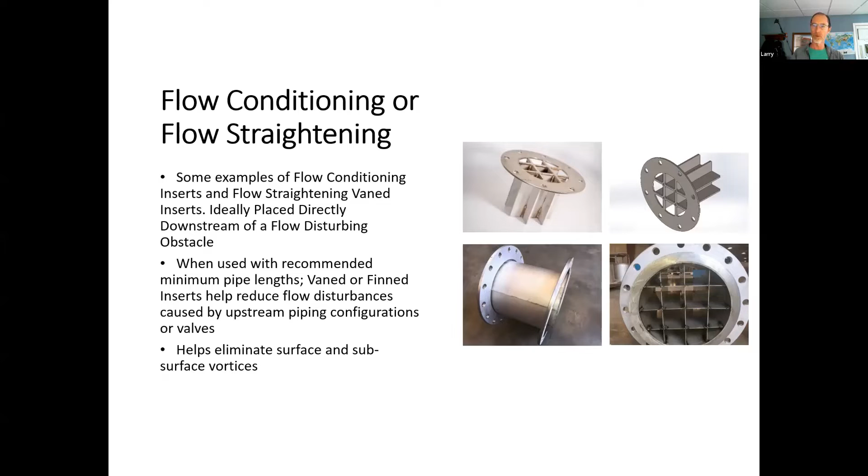Without having to move the meter. And sometimes you can utilize a flow conditioner, a flow straightener, within the existing piping alignment that helps to, yeah, great. These are some examples of what those would look like. Flanged fittings, within a foot or two, or even less than that sometimes, being able to help channelize the flow and getting it back to where there are no vortices or swirl going on within the flow stream, which is what really tends to mess up the flow measurement.

Yeah. Good deal. I know we had some content. We're keeping it fairly high level, Larry, and didn't get into some of this, but since it had come up, I wanted to throw that up on the screen. Yeah. Great.

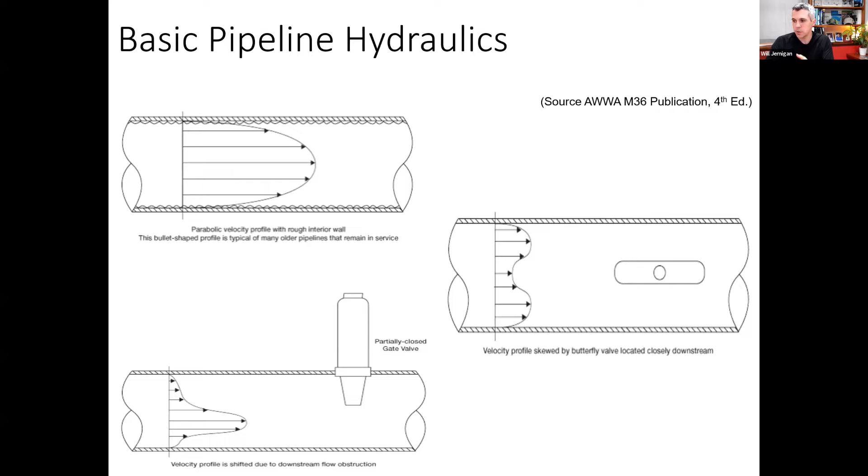It sounds like my group has done some clamp-on testing, and so for others, that's definitely going to be a topic of conversation working with your coach, because this is a common next step, and so it's likely that each coach will be working with their utilities to really talk about what that would look like and helping to plan out next steps about supply meter testing in your system.

Just a quick comment. I know some folks have mag meters and also ultrasonics. Just maybe a reflection on that: hey, those are highly accurate. Do you need to test them, and why? Sure. So it is a question we do get. I was going to show a couple good example pictures, Steve. You do need to; there is no meter that is immune. Some meters handle it better than others, but there's no meter type that is immune from disturbed hydraulic conditions.

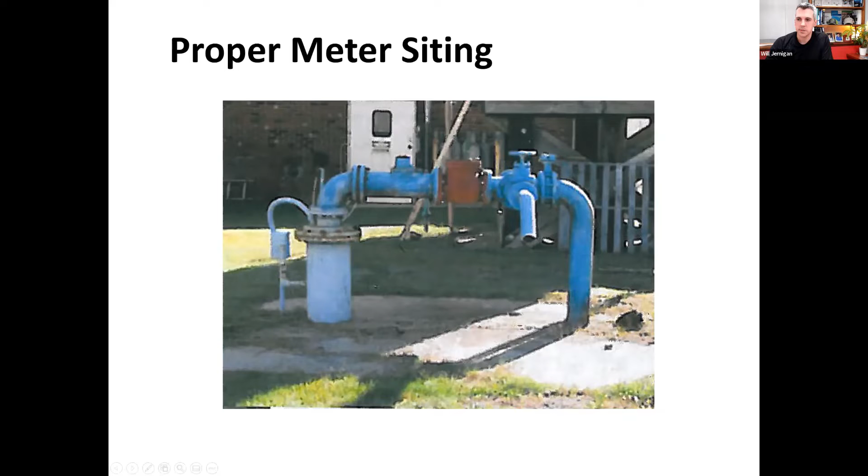All right, I want to touch on another common next step that we typically encounter. It deals with customer meters, and we want to acknowledge up front that not every tribal utility participating in this program has customer meters. So if you don't have customer meters, this part you don't need to worry too much about right now. But there are some tribal utilities in this program that do have customer meters that are generating revenue. And if you're in that scenario, this is an important part of your overall water loss strategy.

The reason is that how well you understand your apparent losses can really impact how well you understand your leakage, because those two numbers work together in the water balance. It's a water balance process of elimination. So you're estimating the apparent losses, and your real losses become what's left over. So if you don't have a great idea of what's going on with your meters, that can have a big impact on how effective you can be on your leakage management program.

So I'm going to give the 30,000 foot flyover of customer meter testing activities as a next step. It's really meant to get better insight into how the meters are performing, first and foremost. That also might inform how you replace the meters. In our breakout group, we had a discussion about manufacturers' recommended guidelines, which is maybe every 8 to 12 years to replace the meters on our metered customer connections.

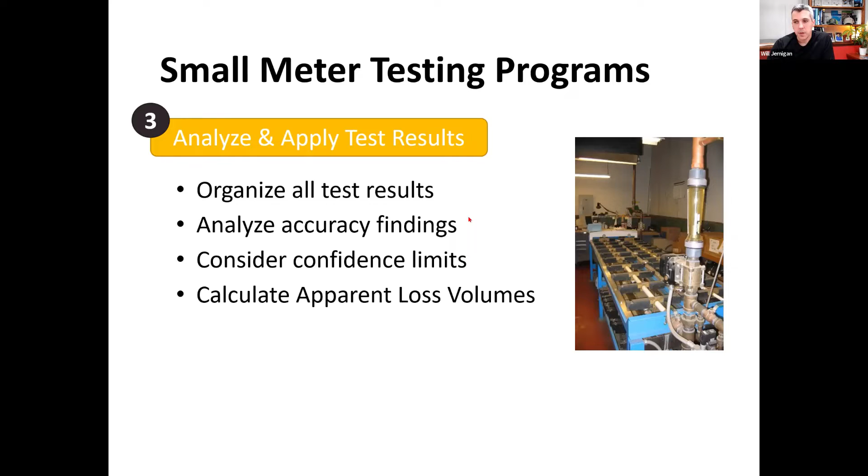So in the end, a small meter testing program can get you a good understanding of how your whole small meter stock is performing by doing random sampling, doing weighted averages across the different flow rate test results, and using that to then translate into your water audit. Remember, in the water audit, there is one box for customer meter inaccuracy. And so all of this activity can help you move from, well, we think the meters are doing okay, so we're just going to guess 1% or 3%, some sort of number you're pulling out of the air, to having something that's a bit more scientifically based. You've got data to really dig in.

So those are on residential meters. I'm going to just quickly touch on bigger meters. Let's say it's the casino or a larger customer account, an industrial account. Typically, these are a lot fewer, maybe just a handful in your system. And usually you can take them on a case-by-case basis. Sometimes people just say, hey, if this is one of our highest revenue generating meters, then we're just going to test it every year and keep a close eye on how that one's doing. These actually end up being sometimes a bit easier to deal with because you don't have quite as many. The trick is the size.

So it depends if you're into maybe a 3-inch meter, 4-inch meter. If you get much past 2-inch, it's not quite as much a bench test anymore as it is a field test. And there are apparatuses that mount to the back of a truck that you can utilize to perform these types of tests. So that's the high level of the difference between small meters and large meters. Small meters, you tend to have more of them. Large meters, you have fewer of them, but sometimes they are actually generating more revenue. So you approach them as two different animals and design your program accordingly.

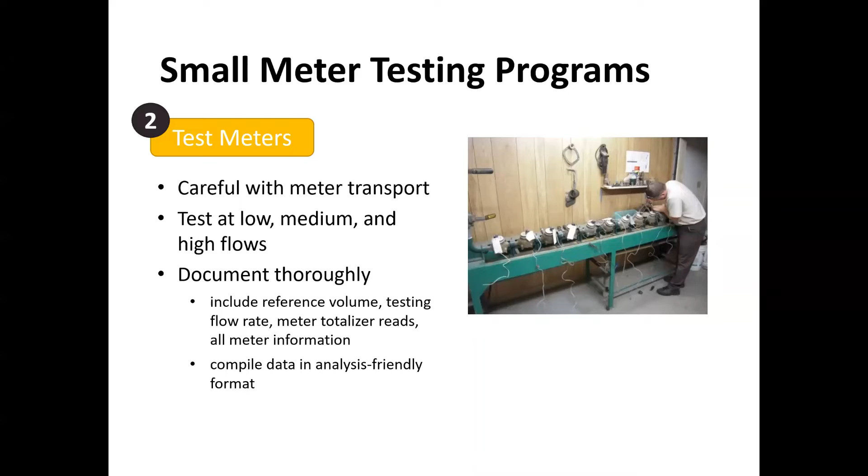You can imagine though, if this is the supply line to a community, you're going to need to shut it off for an hour to perform this test. So that is operationally a consideration, but as long as you can find an hour where that's not a problem, fill the tanks up and let it float off the tanks for an hour. But this is typically how that's accomplished. Yeah, that would work because you have your storage tank on the system, so having a well down for an hour wouldn't be a problem.

Great questions. Maybe just a quick reflection point: do others have that where your supply meters are kind of small, really not much bigger than your customer meters? Similar scenario? Giving folks a moment to get off mute if you wanted to chime in. And no sweat if you're not ready now. That's something your coach is going to be working with you one-on-one on, talking through your scenario.

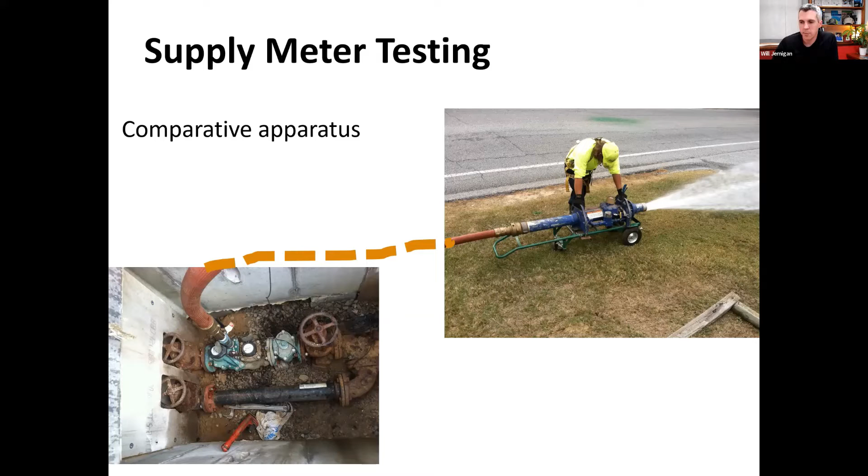To answer your question, it helps if you have data on the meter inventory when you're doing that. Certainly the size of the meter is important. The manufacturer of the meter, if you have that, that's helpful. The install date, if that's available, sometimes that can be helpful in creating bins, especially if you've got a whole bunch that were installed 20 years ago and the rest were installed in the last year. You've kind of got two different buckets you want to think about pulling from there. So bottom line, as much data as you can put your hands on will probably make your sampling as effective as it can be, and truly random.

Okay, great feedback. Let me round us out thinking about this topic, which is our unmetered but authorized consumption. What I'm going to do is really just set the stage here for some important things to think about. We'll handle the nuts and bolts of doing these estimations together in your coaching sessions, or a little later in the breakout today we'll talk a bit more about it. But after this week, when we're working together to help build your level 1 audit, that's where we're going to get into it. But let's start with a common ground that we all are going to be working from.

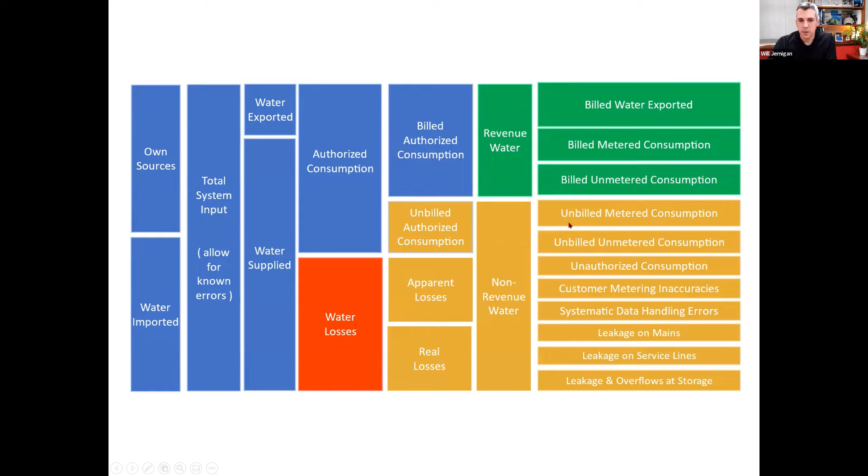We all have a water balance, and so we all need to examine which of these potential unmetered categories we are dealing with. All the way to the right of our water balance, let's zoom in on these two categories of unmetered but authorized consumption. You can see that one of them is in our green section that generates revenue, and the other is in our non-revenue section. It's not generating income for the utility. Typically this is going to be your unmetered but billed customer connections, and you're billing them based on something. It's going to be a flat rate by nature. The question is, what is the basis upon which the bill is generated? That's a core question.

Second category is those customer connections where there's a tap off the main and it goes to their facility, a house or a commercial facility, whatever it may be, but there's no meter, there's no bill, but they do have permission to use water. So it is an authorized use. I do think we have some of that in my breakout group. So again, we need to think about the same question: okay, we're not billing it, but what is the basis for making some type of rational estimate, and have that baseline when we're developing the audit.

Of course, utility usage and fire usage are examples that we've touched on a little bit, and we'll tee that up in a second. But all three of these potential examples of unmetered use need a unique approach to how you're developing these estimates. So I wanted to start by asking: if you're billing customers but there's no meter on the connection, I'd love to hear how you are determining the bill amount, and what is your current approach to establishing how much to charge them for water consumption? It could be on a monthly or an annual basis. Do I have any volunteers in the class to speak up and share how you're handling that?

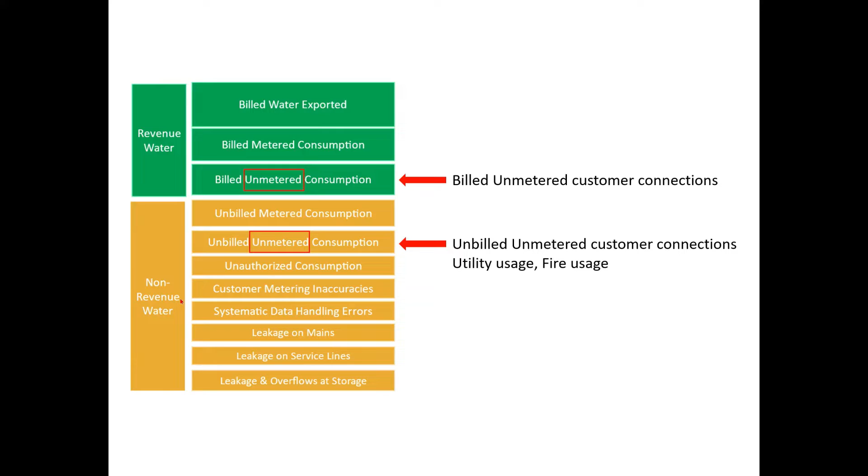Yeah, that's correct. We're a subsidized department through the tribal government, and even the revenue that we do generate goes back to the tribal government, and we don't have any control of that revenue. Okay, I see.

All right. Well, thanks. Just one other... I'm sorry, go ahead. We're all talking over each other. Rolanda, you go ahead.

Yeah, I was going to ask, based off of what I said before, what would be the recommendations? I think the facilities that I'm looking at do have supply meters. And I'm thinking just the estimated number of homes that we assume are connected to the system, because some tribes do their own connections, right? They may not have proper as-built drawings or provide that information to IHS. So in my mind, it would just be the estimated supply connections per home. But are there any recommendations from Cavanaugh on how we would estimate the proposed water usage?

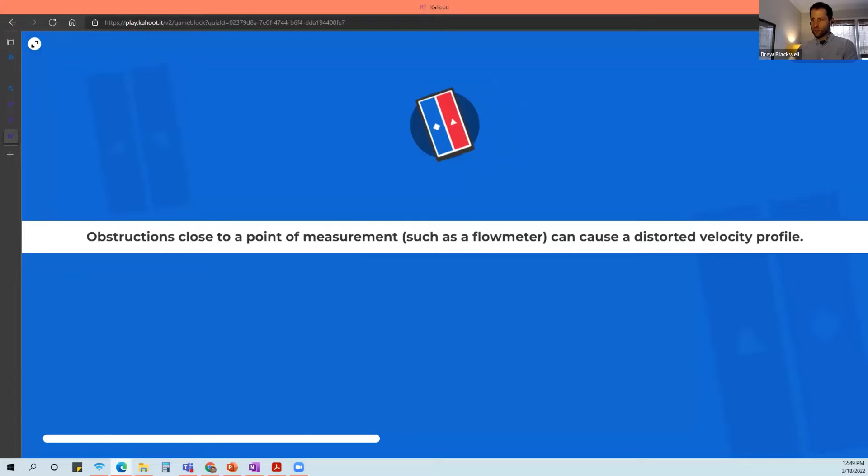Hey, at least we're getting some testing our knowledge on these terms that we've been talking about, right? Unbilled, metered, test port, BMAC. All right. I think we're ready to go here. So let's launch the supply meter testing. All right, true or false? Obstructions close to a point of measurement, such as a flow meter, can cause a distorted velocity profile.

Okay, you guys were on top of that one. Yes, true. So the different velocity profiles that Will and Larry walked us through, and you saw the image there of a partially closed valve that was certainly distorting that flow profile there. All right, let's go to the next one.

Oh yeah, gotta make sure we check out our leaderboard. All right, Nicole is in the lead here.

All right, choose a consideration when thinking about supply meter testing. What do we need to think about there? All right. We are not fooling anybody today. Yep, definitely. All of these are considerations: flow rates, test location. Think about that image that Will pulled up, where it was really impossible to get a good test there with that meter location. And then that test duration.

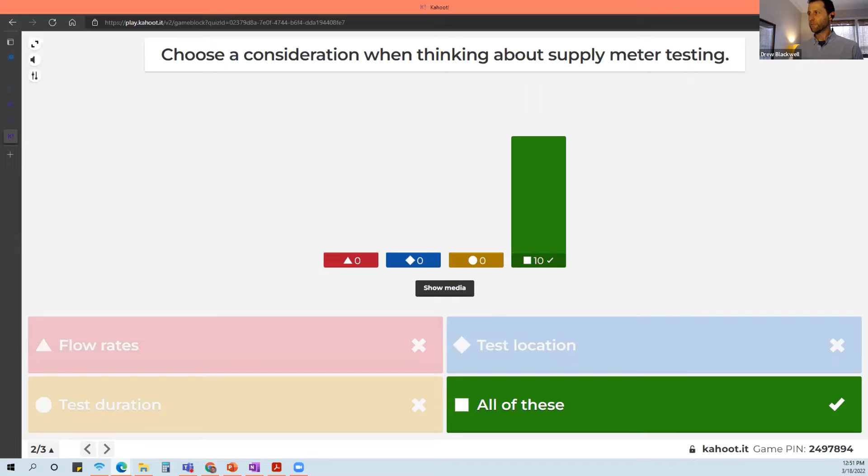We were looking at that example, Ross, that you brought up, with the comparative analysis. And if we are using that on a smaller meter that's providing the supply, if we need to shut off service there, we want to take that under consideration, not just operationally, but based on the test method, if it really requires a certain duration. All right.

Okay. Trish has just squeaked into the lead there. All right, so this will be the last question for our supply meter testing to see who the supply meter testing expert is here. All right, which is not a supply meter test method? All right, man, you guys are on fire today. All right. Unbilled, unmetered.

I had to turn on some sound. I'm actually not sure if you guys can hear that sound or not, but if you can, I thought it was a good ad for those on the podium. Okay,

so that was the supply meter test. Now we're going to move to testing our knowledge on the customer meter testing as well. All right, so unfortunately this one does have a new pin here, guys, so you'll have to enter one more pin. And again, for those that would like a verbal cue, the pin number is 688-6562. 688-6562.

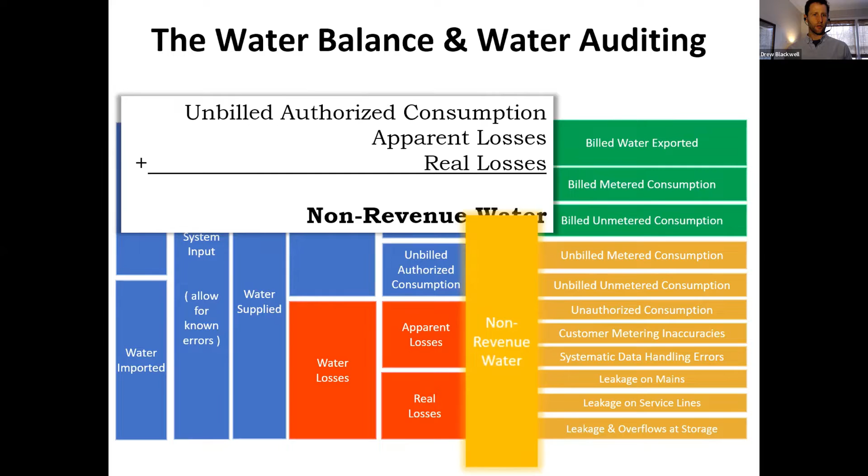All right. So again, we went through that common exercise where we were working through our water audit boundary, whether we had water exported or water imported or volume from own sources. It's important to understand what are those meters that we are concerned with, that closest point of entry of treated sources into our distribution system.

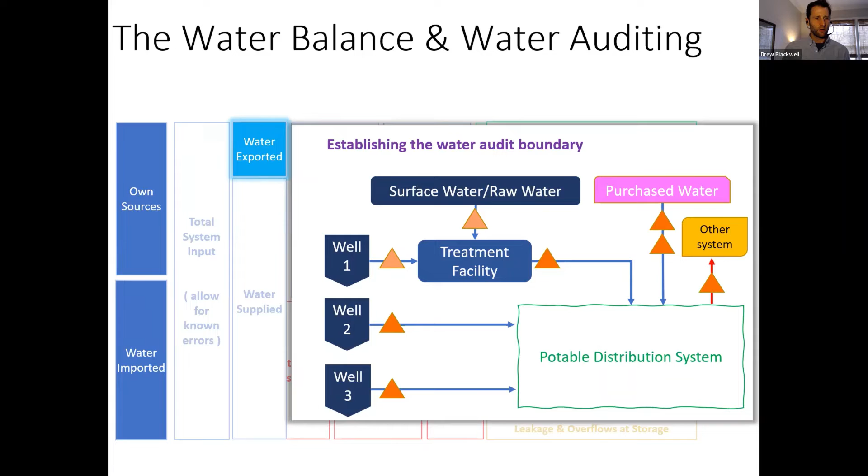All right, once we understand that, we started talking about introducing you guys to the free water audit software, and started out with, again, asking that question of why have a water audit. And it's really that first step that utilities are taking towards measuring their water losses, quantifying their water losses. Without that, we just don't know what water we're losing. Regardless of our incentive, whether our incentive is revenue driven, or as Will suggested with our unmetered authorized consumption, it could be more driven through accountability and just operational efficiency, and reducing some of those costs. So it's that first step that we're taking to quantify our water losses, and I guess knowing a little bit more of what we don't know.

So we gauged folks at the beginning of this program to see where you were in the process of understanding the water audit, what your background was, and through the course of this week, we definitely picked up on the sense of excitement to get hands-on in the software. There's a little bit of a teaser on day one with sharing the still images, and once folks got to click around and start entering inputs into the water audit software, that's where the thinking of how this might work for your utility begins.

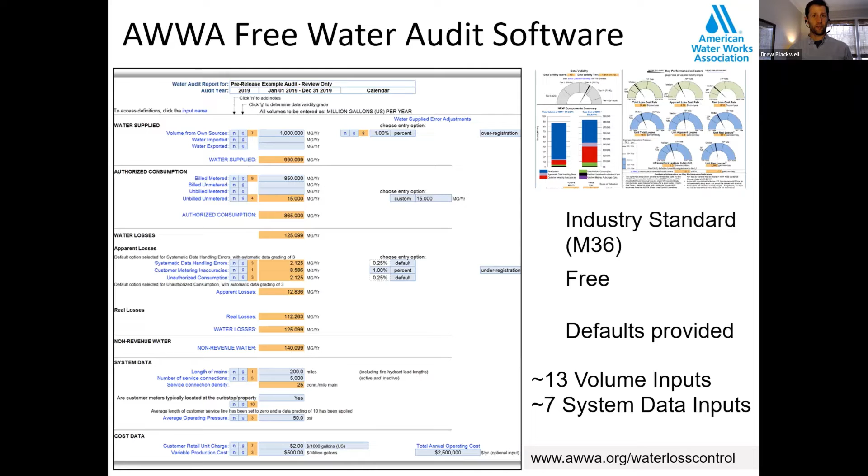Not a ton, there's approximately 13 inputs for most systems that will be applicable to them. Some will be applicable, some won't, but it's not a lot of information to key in. And as you guys picked up, and we'll continue to see, probably the greater effort there is making sure that we're gathering the information and understanding if it makes sense and if it's correct before keying it into the water audit software.

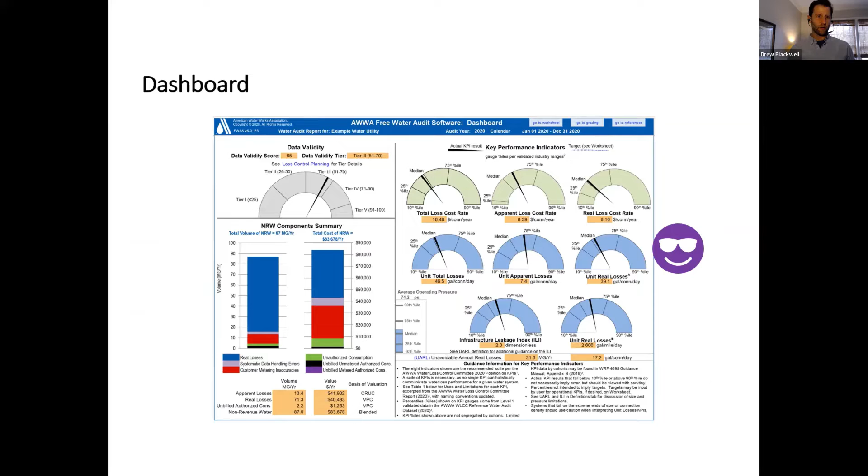We spent some time on the results, on the dashboard setting. So one thing that we are interested in learning about, of course, is how to interpret these results, starting from what does our data validity mean, that score out of 100, that fighter jet dashboard that Will introduced, and what are these percentiles based off of?

And now we understand that these needles on our dashboard are not necessarily how we're stacking up against other tribal utilities, but where we fall with respect to other validated water audits in North America. We can see that from a volumetric standpoint, our losses in gallons per connection per day, as well as from a cost standpoint in dollars per connection per year. And over in the left-hand corner, we see a non-revenue water profile in terms of volume and value.

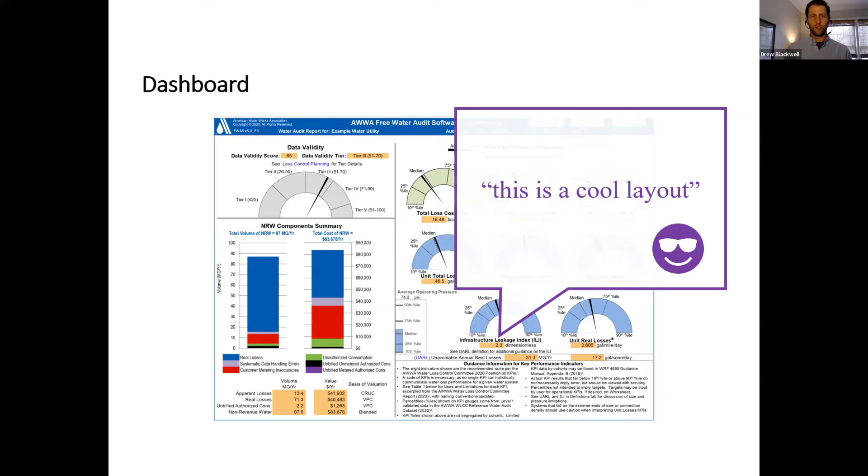And remember, your largest component volumetrically is not necessarily going to be your largest component from a cost perspective. It could be your largest component volumetrically is leakage, but your largest component from a cost standpoint could be your metering inaccuracies or something else. So something to keep in mind when we populate our water audit and are looking at our non-revenue water profile.

All right, but before we even get to that, Will walked us through some steps on how to develop those inputs. There was a 3-step process that we went through: assemble the supporting documents. So we looked at some that we really need to have to conduct the water balance, right? Our supply data and consumption data.

So we have some information that we need to have to run the water audit, but there's also some information that is not required, but it's good to have if it's available to us and applicable to our system. So if we have metered customers and we have some test results, that might be good to have, but not necessarily required. But to calculate our water losses, we do need supply data and consumption data. And I'll show to what extent we need that in just a second.

But once we assemble those documents, we always have to make sure: does the data make sense? Are there any errors or any gremlins, as room 3 so aptly coined it, embedded in the data? They can pop up in any place, and as part of this validation process, your validator, your coach, is going to be looking into that to make sure that all the data has been brought into the water audit correctly.

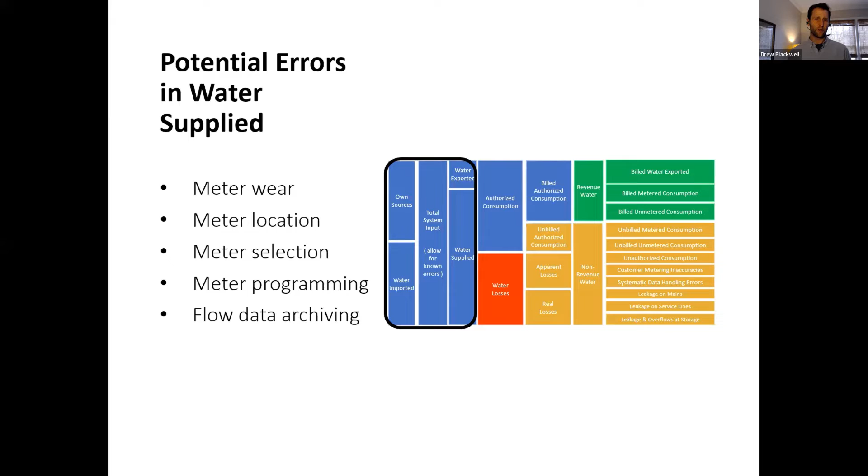Just as there is in the authorized consumption as well. It could be in the form of duplicated volumes. Maybe we have some non-potable volumes that are inadvertently included in our consumption data, or maybe we're lacking some information there. But these are all known places for error, places to look, and continuing to ask ourselves as we're pulling together the information, does this make sense?

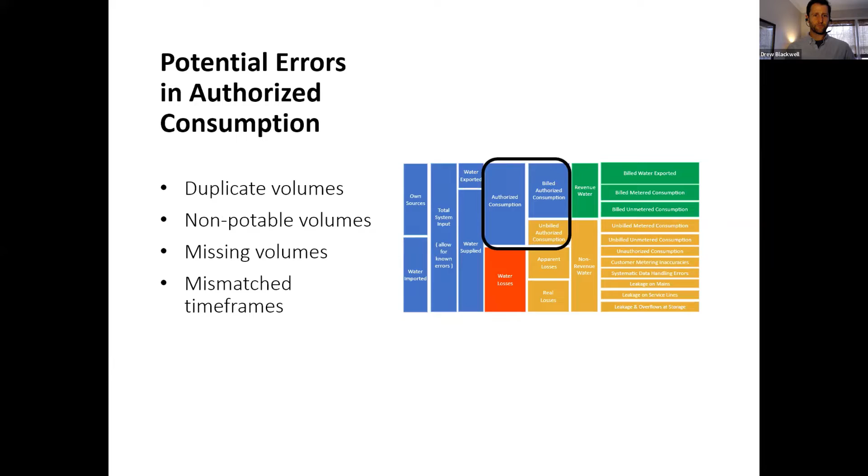All right. So yesterday we started talking about the concept of data validity, the data validity grades, and that level 1 validation. We always look at our water audit results in terms of these 3 V's: the volume, the value, and the validity. We see here again validity as the biggest cog in the wheel. It's an important part of your water audit. Understanding how reliable is the data that's going into our water audit.

So we know if we have a low certainty of data going into our audit, we're going to have a low certainty in the results that it's producing. But through this new interactive data grading process, the software tool is extremely helpful in helping us understand what our next steps are going to be, as far as identifying that there's limiting criteria there.

So you saw as we made our selections in those drop-down menus, that limiting criteria started to move around until we finally got to our data validity grade, and it landed on what the 1 or 2 limiting criteria might be for that particular system, and that gives us a roadmap of sorts to understand what practices we might consider implementing into our system.

And even if it's not a utility perspective, even if it's from a local IHS staff, this helps us understand, again, some of that operational efficiency, some best practice management that we might consider inserting into our system.

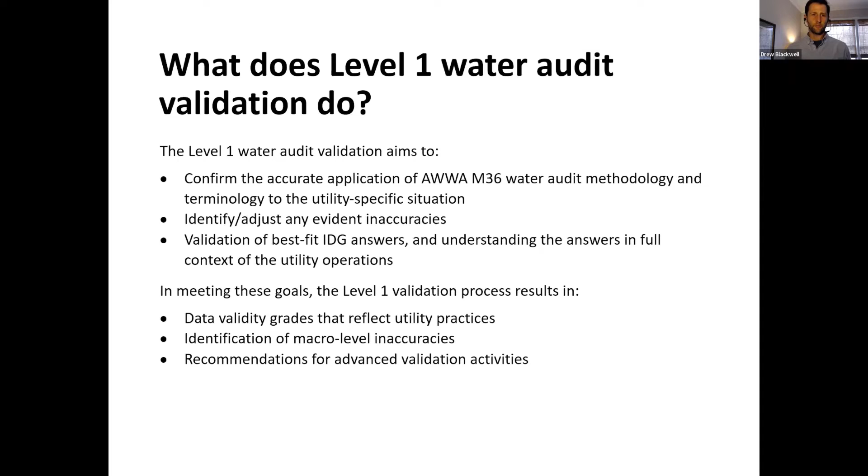A couple things that it doesn't do: it doesn't go out and test your meter, your supply meter. It doesn't correct any of those inaccuracies in the raw data, and doesn't corroborate any of the leakage that is quantified in the water audit based on any more detailed analysis, more bottom-up approach. Those are certainly available beyond the audit, but that is not part of the scope of a level 1 validation. That is really keyed into making sure the data is brought into the audit correctly and assessing those data validity grades correctly.

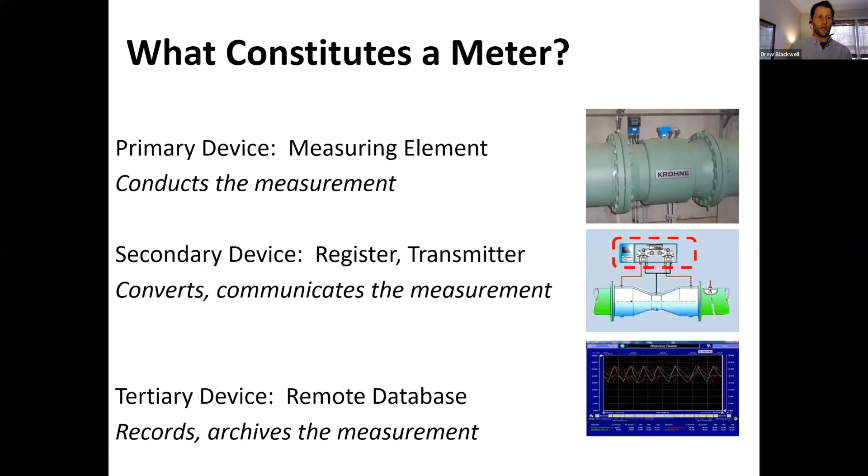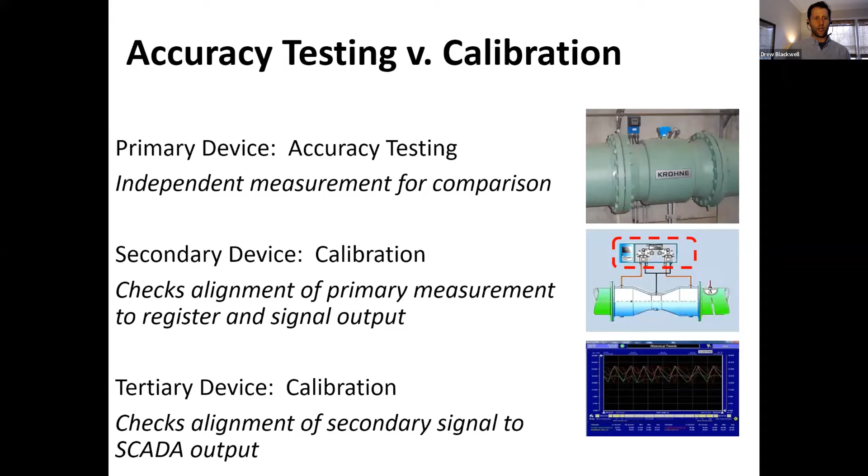I'll move through these pretty quickly because we just talked about these, but the supply meter testing, really just introducing the considerations that we need to think about before we jump into it. Understanding the different components of the meter, and what type of testing, whether it be flow accuracy testing or electronic calibration. We need to understand the anatomy of a meter and what type of test it is we want to perform. Will and Larry walked us through these different test methods.

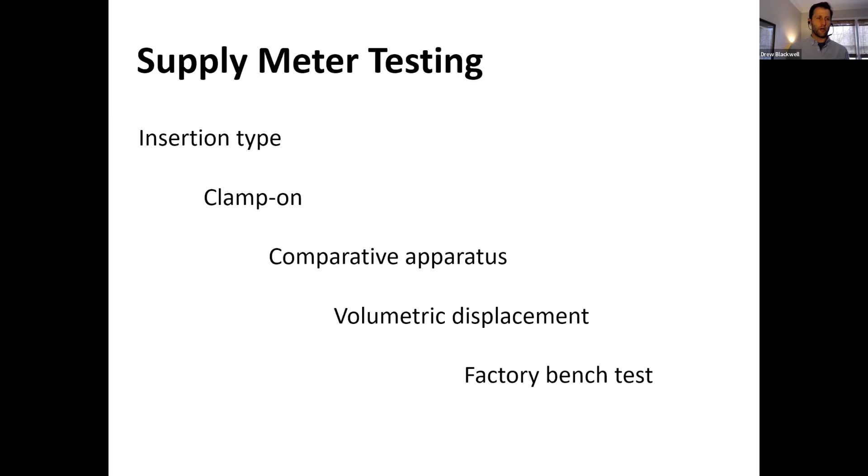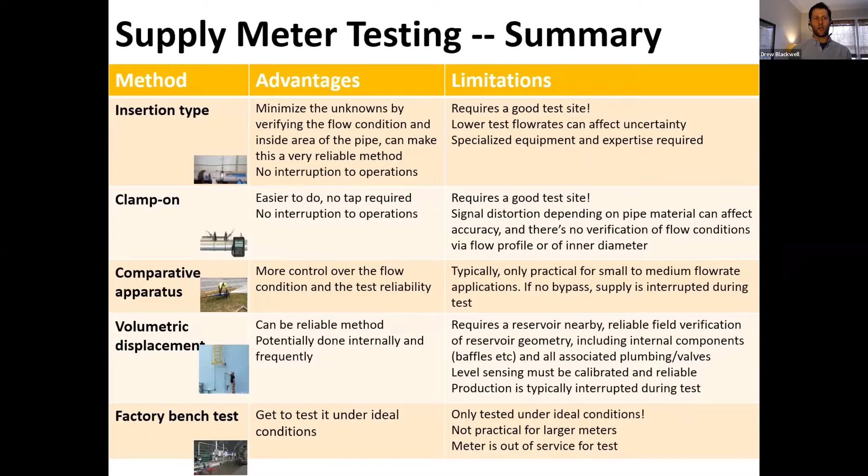There's a variety of test methods out there because depending on your meter setup, some of these test methods might not be available for you, or one of these might be the best available method that you have to choose with. So this is a great takeaway slide here that we'll share on the resources page on the website. But this is just a good summary slide to help you understand what type of supply meter test might be most beneficial for your setup.

Will walked us through the customer meter testing, and at a high level, this is going to help us calculate our apparent losses. If you recall, in the water balance, our apparent losses are made up of the systematic data handling errors, customer metering inaccuracies, and unauthorized consumption. Typically, in a setup where the customers are metered, customer metering inaccuracies is typically the largest volume of our apparent losses.

So if we can, we want to make sure we get the best handle on that number as possible. The other two components there have a default option, and without further analysis, those are also difficult to quantify. So if we have some information on how our customer meter population is performing, we want to use that information to build it into the audit.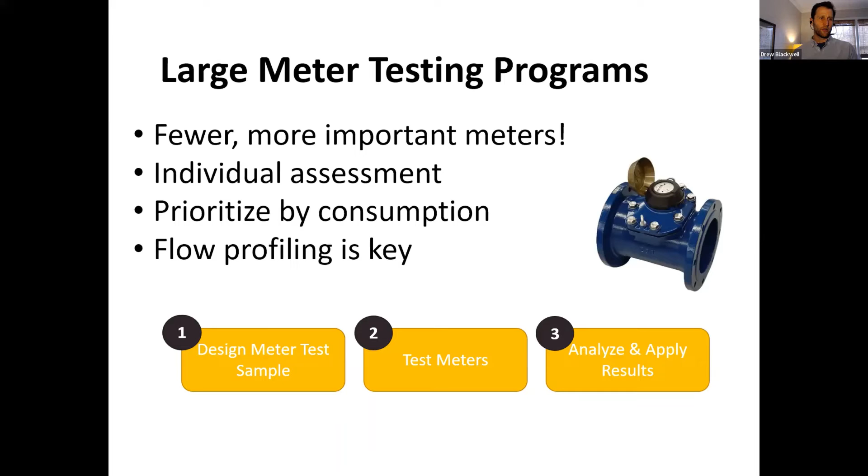The unmetered authorized consumption here is one thing that we know is going to be very relevant to many of the tribal utilities in this program. This is whether it's billed and unmetered. There's some ways that we can estimate that typical household usage or understanding the number of connections. If we have some billed metered customers, perhaps we can infer some of the consumption behavior to estimate what some of the billed unmetered consumption is. But if we're unbilled and unmetered, and we don't have any of that billed meter data to go off of, then we need to find another way to estimate that.

We know that some unbilled unmetered usage can be uses at your own facilities in your own system. Some of it can be attributed to fire suppression or any other usage where your policy dictates that usage is exempt from billing or from metering. But if your end users, your customers in your community, are also unbilled, unmetered, we need to look for ways to estimate that. So that's one thing that we're going to be looking at. You're going to be working with your coaches to pull those estimations together.

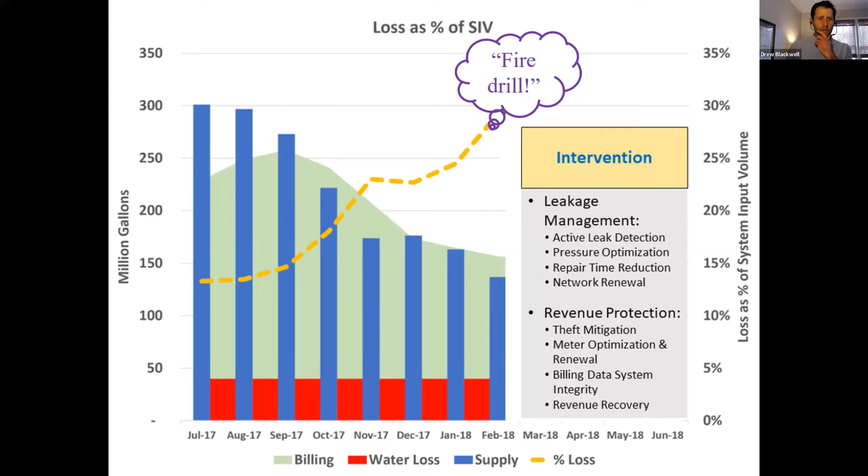So that first step was a more technical analysis. This could include a detailed data analysis into your billing information, down to the raw billing data at the account level, or it could be performing a real loss profile, a leakage profile there. So what that leakage profile might look like, just as an example, is to separate out your different types of leaks.

When we think about leaks, we commonly think about the leaks that are coming to the surface, and a member of your community or your staff are alerting you to these leaks. But usually those are just the tip of the iceberg, the smallest part of your total leakage profile. Unreported leakage are leaks that are not coming to the surface, but they're typically detectable through acoustic leak detection. There's also background leakage, those weeps and seeps in your pipes. Those are not always going to be detected through traditional leak detection.

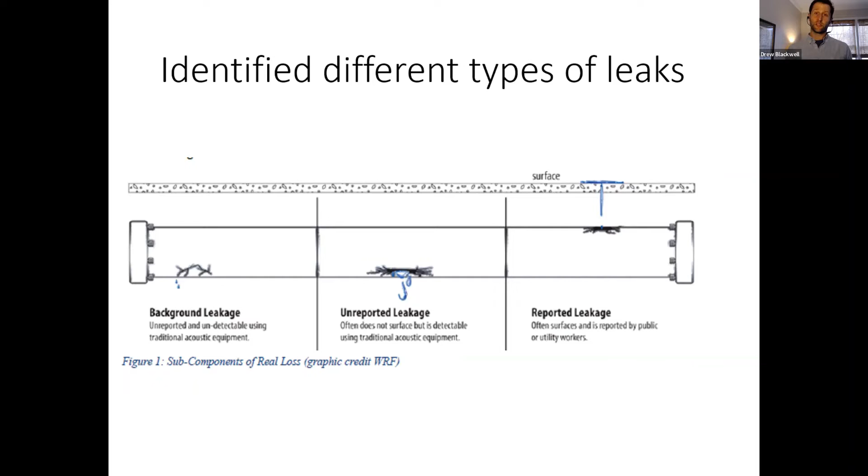So the takeaway there is that each of these different types of leakage has a different intervention strategy that's appropriate for it. So this real loss component analysis, as it's termed, is one step in that technical analysis that you can do beyond the water audit when we're ready to make that step. And you can see again, different types of leakage have different tools associated with them, from reported leakage to main and service replacement, to unreported leakage, where maybe we're doing leak detection, and then background leakage, where maybe pressure management is the right tool for the job.

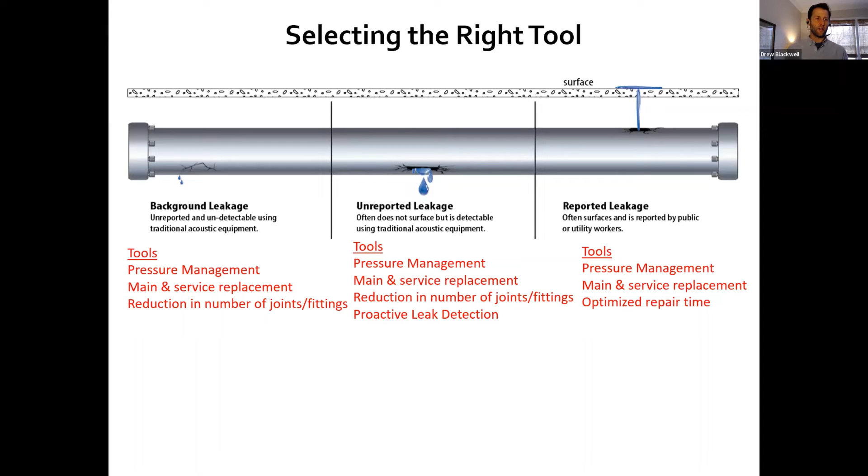In economic analysis, we've said several times throughout each day of the workshop that our goal is not to get to zero leakage. In fact, we would most likely be overspending more than the water is worth, either through aggressive overspending or reactive overspending. So our goal in our water loss program is to find that economic optimum level of intervention. And we can do that through an economic analysis by understanding what is economically recoverable.

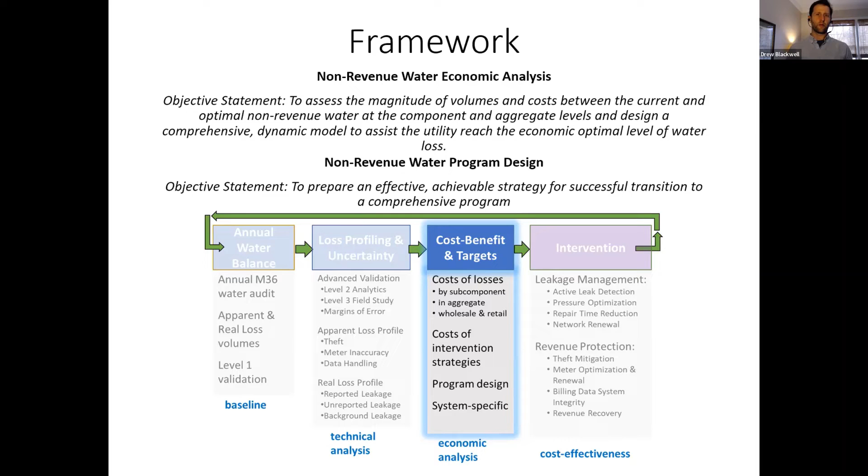Again, these are all steps that we would consider beyond the audit, but it's good to start thinking about what steps you might take further on down the road, whether that's a year or two years down the road, understanding that as we progress through our water loss program, these are next steps available to us.

So in economic analysis, at a high level, we'll take what our current annual real losses are, determined through the water audit, and then what is economically recoverable. And so we have that gap in between where we have room for recovering that revenue in our system there.

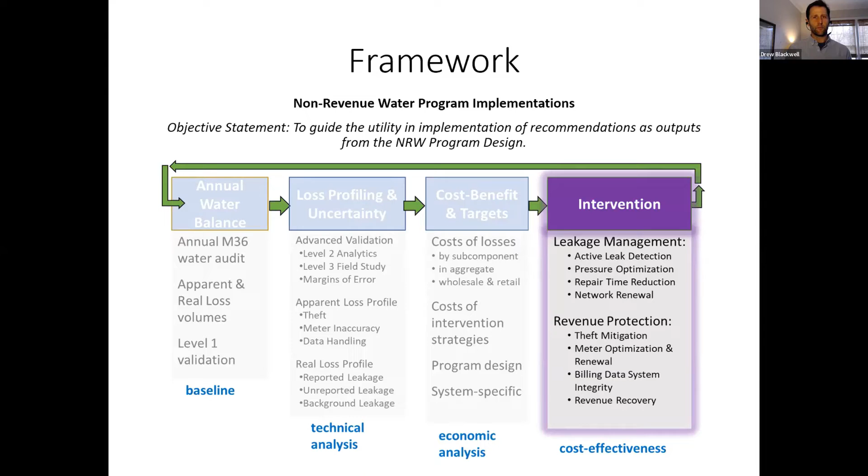And then the intervention strategies: each of these steps along the way will help define what is going to be the appropriate intervention strategy for our specific loss profile. And it's important to see that reducing our water loss can be beneficial in so many different ways. We often say that the closest and most obtainable source of additional supply is that water that you're losing in your distribution network each year.

So we know that these water loss control and management activities can have real significant cost savings here, and a lot of you are starting to pick that up as we've moved through the workshop this week.

Hey, Drew. Yes. Drew, just if I can add one quick comment there.

I think about just the tribal systems themselves, and looking at putting forth programs for infrastructure improvements. Maybe it's funding packages supporting the need. It's programs like what we're talking about here that carry it through to be able to say, instead of we've got this need and it may not be as well documented.

What this process does for each tribal utility is to establish that baseline, as you've been sharing, but also to be able to show, hey, now we can start taking some looks at the economics and then the implementation strategies. So I think about it in terms of documentation of need, and in many cases, not just in tribal nations, but in state systems and other utilities, there's an intended use plan, or there's some justification for funding. And this plays in extremely nicely, I see, potentially with the tribes as well, tribal utilities. Just a comment.

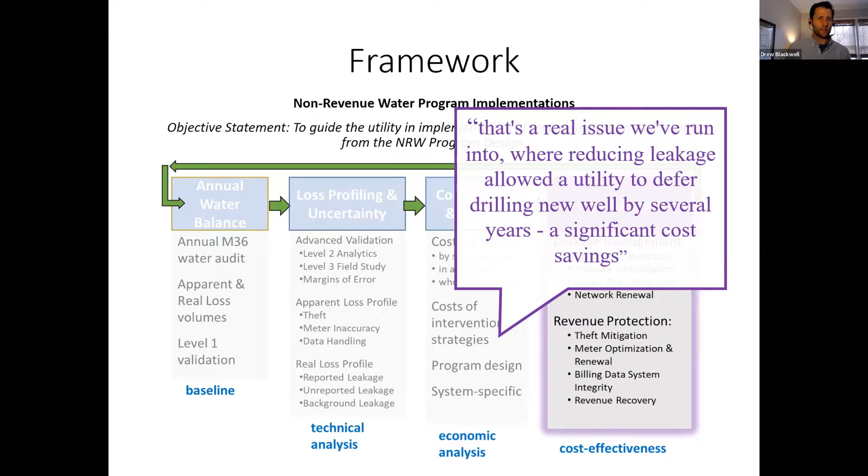And just as a reminder, this is where we are. So to close out the rest of the day and the week, we're going to move now to the next steps in the program. So pivoting from all those key concepts in the M36 methodology to what is in store and what you can expect for the remainder of the program here. And then we're going to have a little bit of time where you can meet with your coaches. They're going to also talk about those next steps in a little bit more detail and share some resources with you that will help.

You're also going to establish a rhythm of times that you can meet and other times that you can schedule some one-off meetings to discuss any questions that you may have or appropriate data that we'll be requesting. So your coaches are going to walk through the data request sheet that we have, just a checklist of information that we'll be looking for. So those are all things that we'll be covering in that breakout exercise.

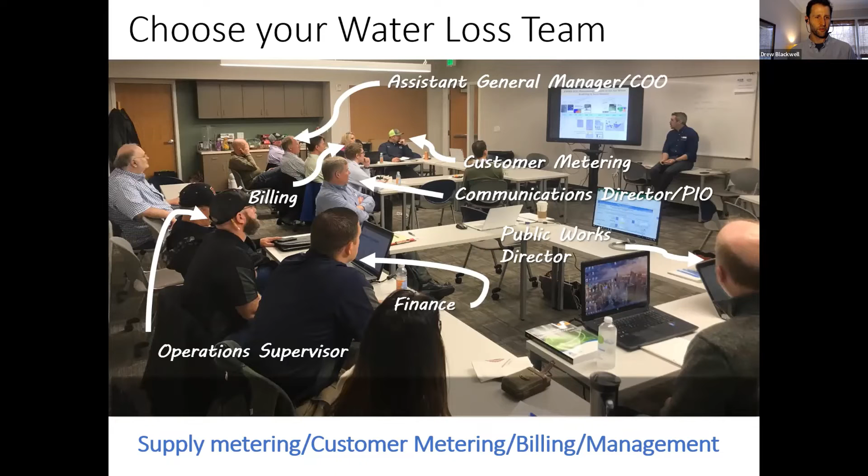But some of you have already picked up on this. You may have noticed that all of these comments here are comments that we've been collecting throughout the week. So this person has already picked up that this is certainly a team effort, an interdepartmental team effort. If you are just one person in your system tasked with gathering the data and populating the water audit, then what we're really lacking there is those team members pulling together the data and their role in the water loss team. All of these folks have a specific role and an importance to the bigger picture of your water loss program.

So once we have established our team, then we're going to start meeting with our coach. So you're going to establish some frequencies and ways that you can book time with your water audit coach in our breakout session. Your coach is really going to be at your disposal here.

What we're going to encourage is use your coach. Don't sit there and stew on anything. Certainly we've provided those M36 manuals. It is an incredible desktop resource. But also we encourage you guys to pick up the phone or schedule time with us. Those are preferred, so we can have a discussion. But we're also looking out for questions and email to us as well.